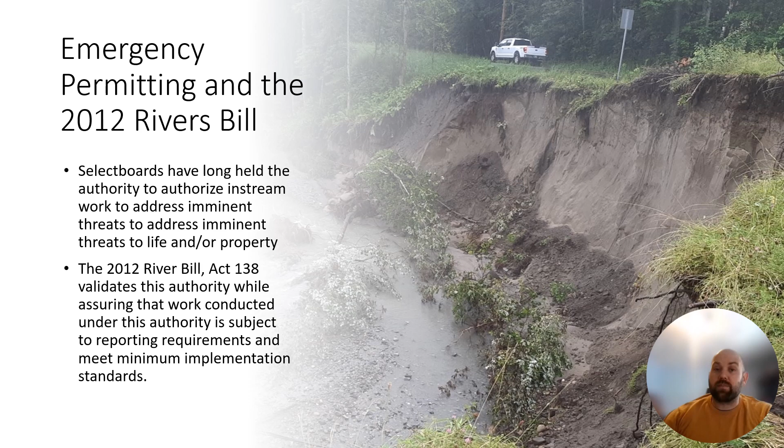Requirements for authorizing in-stream emergency protective measures are clearly laid out in 10 VSA 1021. So towns should limit the work that's done in response to the minimum amount necessary to reduce threats to improved property, infrastructure, or public safety. They also need approval by the municipal legislative body or someone who's been delegated the authority to oversee public safety, and they should be reported to the Secretary of Natural Resources within 24 hours of the onset or start of the work. They should also be implemented in a manner that's consistent with the stream alteration general permit.

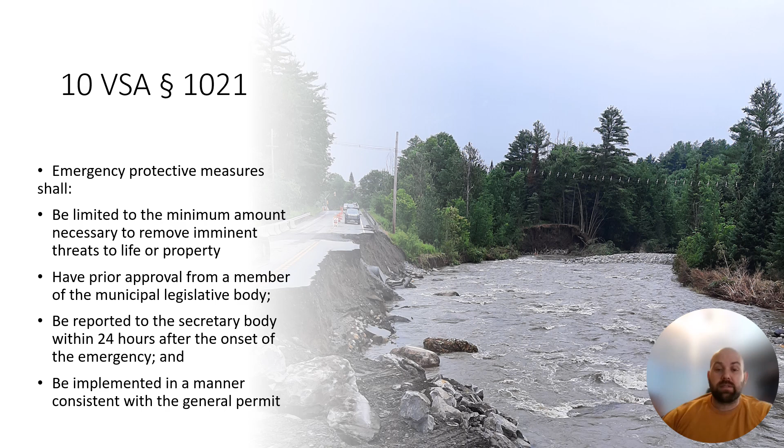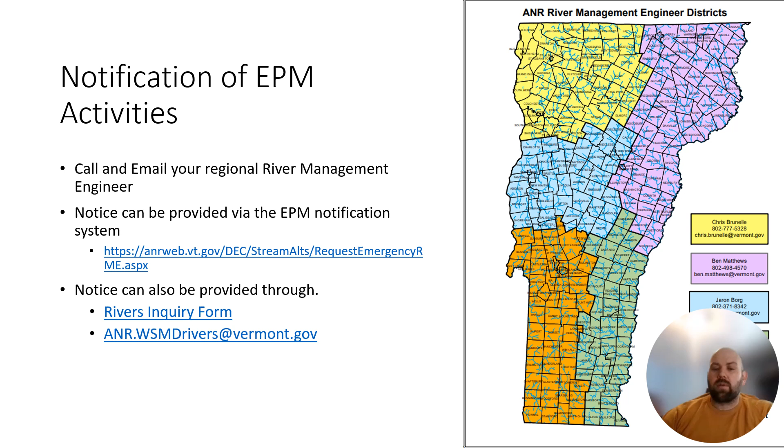While ideally notification of emergency protective measures are given in advance to a member of the Rivers team, we know that's not always practical, so we have a number of ways to contact us that may suit your town or your town's infrastructure better than other methods. First and foremost, though, is to call your regional river management engineer or email them directly. In flood responses, we can be rather busy, so we have a series of other methods to contact the agency, including a specific notification system, which we would prefer most emergency protective measures to go through. We also have an inquiry form and general mailbox that can be used for these purposes.

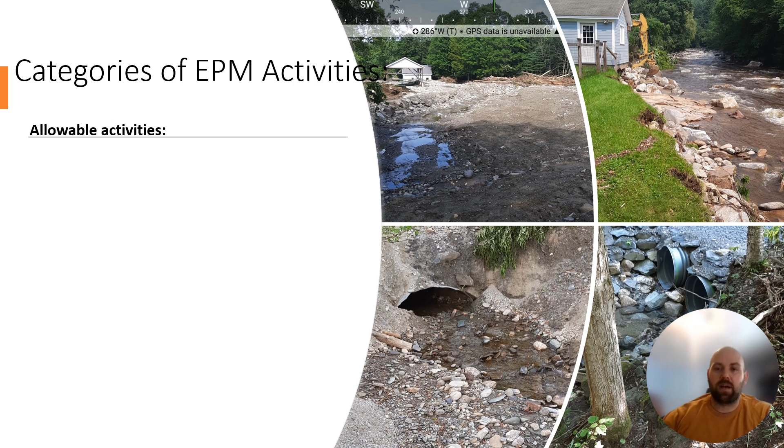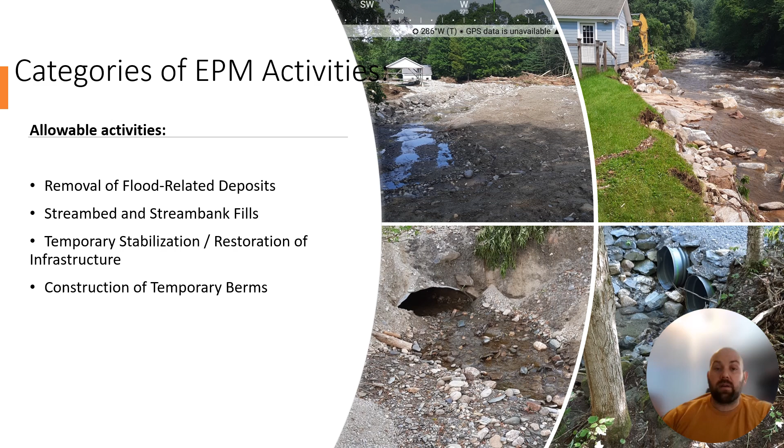If you do use the emergency protective measure reporting tool, there'll only be 4 categories of emergency protective measures. Now, clearly this is not exhaustive, but it tends to cover most cases of streams threatening infrastructure. They include protection of infrastructure with temporary berms, stabilization of stream banks that are threatening improved properties, removal of excess sediment to restore channel capacity, as well as temporary replacement of structures where an appropriate size structure cannot be acquired in a timely fashion. Each of the 4 general categories come with their own implementation standards, so we're going to go over those now, starting with the removal of flood-related deposits.

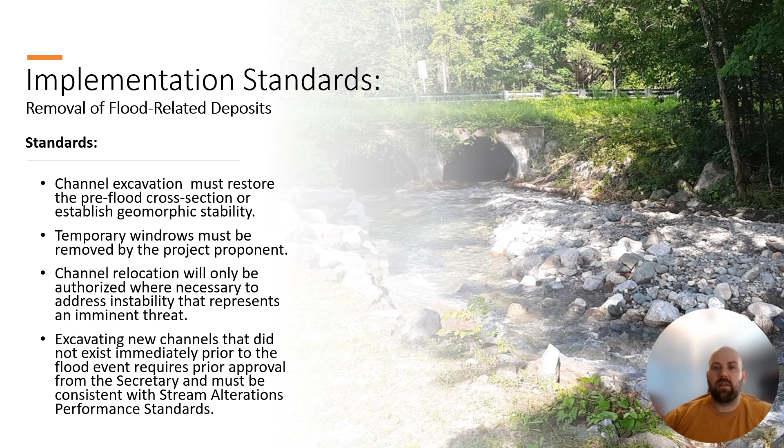So a lot of places will fill in with material that needs to be excavated to restore channel capacity. The removal of material should be limited to the pre-flood cross-section of the channel. Any material stored on site will need to be removed to assure that we are not creating a berm and worsening a situation by the locating of those excess materials. Channel relocation sometimes occurs, but it should really be reviewed prior to being conducted because we can set off a channel evolution process and cause a whole bunch of issues with that. Excavation of new channels is rare, but can occur only during an imminent or ongoing threat where it's deemed necessary to protect private or public infrastructure.

Stream bed or stream bank fills are probably the most common emergency protective measure taken in response to flooding. These consist of basically armoring a stream bank to protect infrastructure. While temporary fills can be used that are not sufficiently sized, if you are importing material, it should be properly sized to resist the flows. And if you're going to bring in appropriately sized material, please make sure that it is keyed into the stream bed as well, so that it does not need to be replaced after the fact. The other item to note is these should not be pinching in the stream, because that can trigger further impacts up and downstream from the actual damage site.

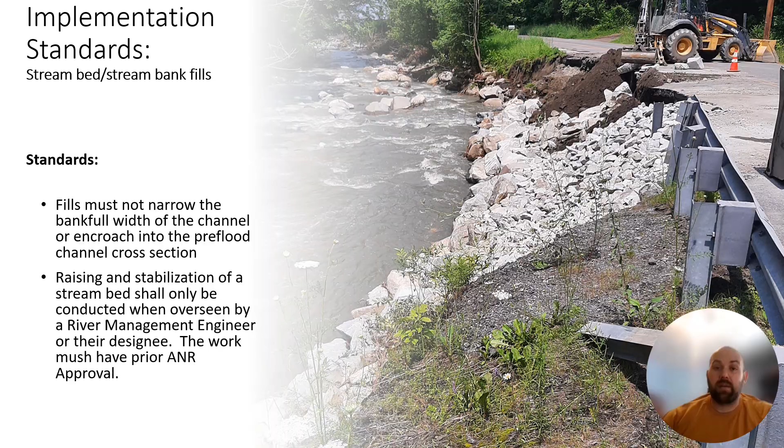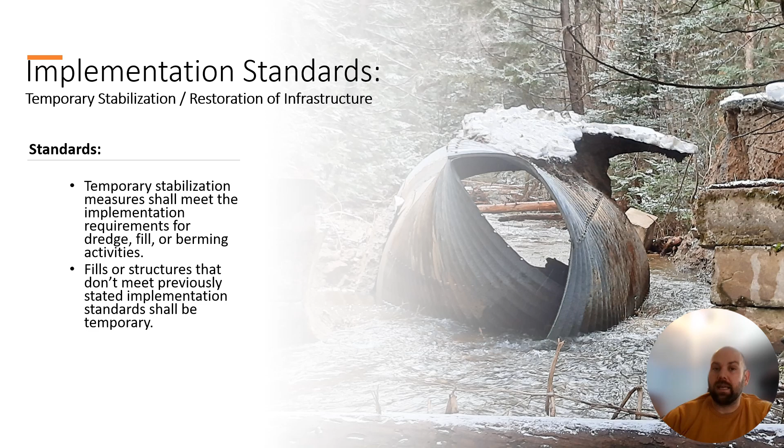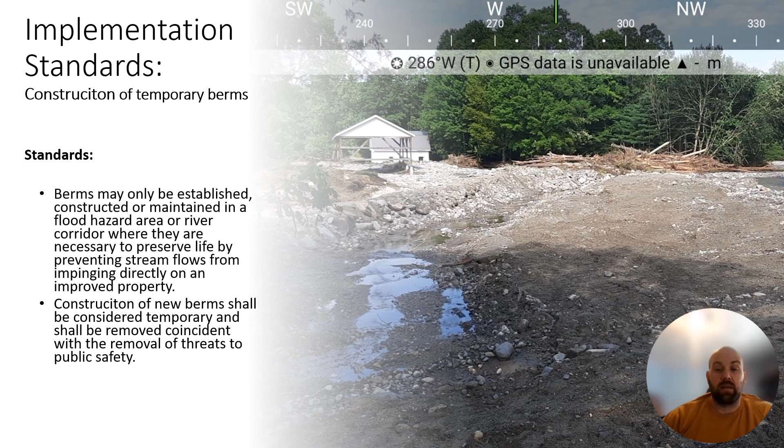And then we have emergency protective measures for construction of temporary berms. Please note that placement of a berm in a river corridor is typically going to further energize a stream. Therefore, berms are only allowed in a temporary fashion to protect infrastructure and must be removed concurrent with the threat, or at least within 180 days to assure that we are meeting National Flood Insurance Program guidelines.

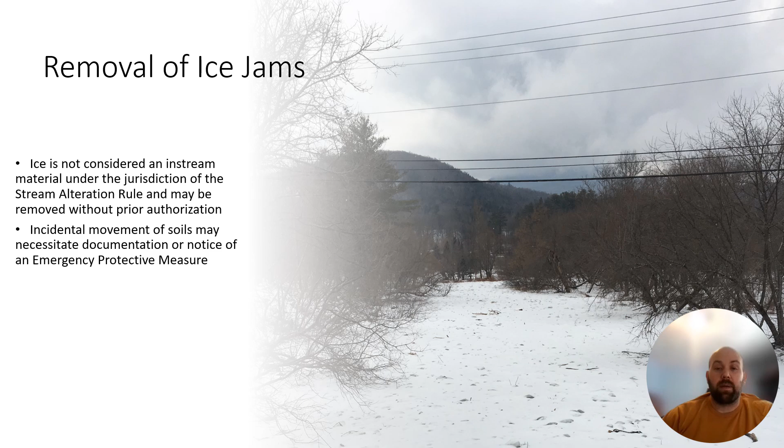So stepping aside from the typical emergency protective measures, we also have ice jamming that occurs around the state. Ice is not considered in-stream material for the purposes of regulation, so it may be removed based on the judgment of the town without reporting to the agency. I will note that due to the scale of ice jams, sometimes there's a fair bit of earthwork that needs to occur just to remove material, if it is practical at all, and that might require a stream alteration permit. So again, reach out to your regional river management engineer. We'll be happy to assist technically and figure out the best solution if these do occur in your town.

Finally, I do want to speak to the fact that the stream alteration rule does not operate in a silo. There are regulatory overlaps at the federal and local level. The most important one for towns will be the local regulation overlap with the National Flood Insurance Program. So any towns participating in the National Flood Insurance Program will want to document any work that occurs within a mapped floodplain or floodway, as well as assure that that work meets their own implementation standards in order to remain compliant with their flood insurance policy.